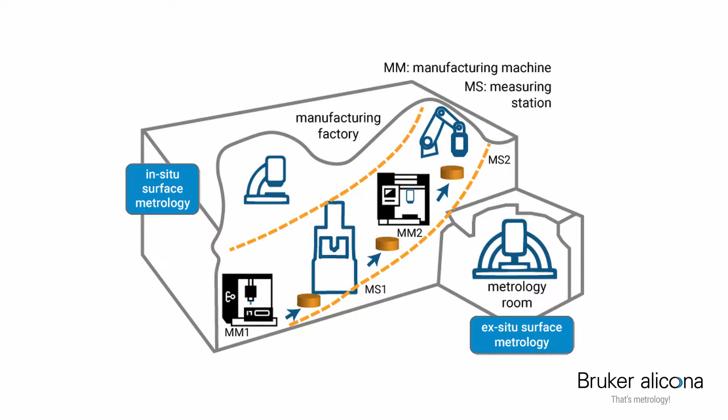But what does production measurement technology stand for, and what does it mean for us? We would like to explain this in 5 terms. Depending on where the measurement system is located, we talk about ex situ and in situ. Ex situ means it is located in a separate measuring room. In situ means it's located in the production hall.

Then we also differentiate between inline and offline. Inline means directly in the production line. Offline means directly next to the production line. And then we have a special term called on machine, which means the measurement sensor is directly integrated into the production machine.

And now we are changing location and start with the first application and the first company, Festo.

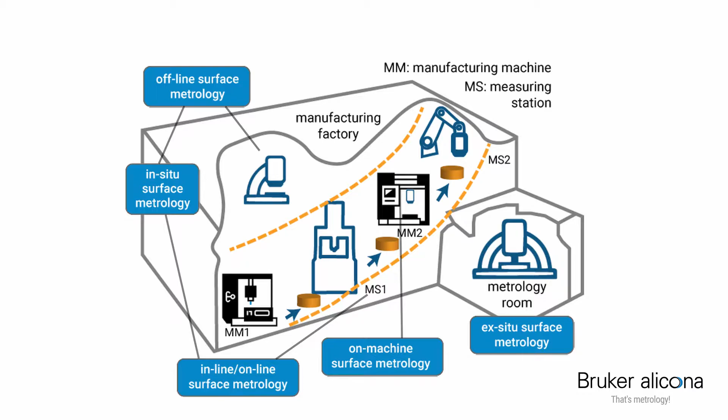With the application of Festo, we are able to focus on 3 requirements to production metrology: usability, flexibility, and the capability of the measurement instrument.

Festo is a global player and an independent family business from Esslingen in Germany. As a world leader in automation technology, they offer products, systems, and services surrounding pneumatic, electrical control and drive technology, whether in factory or process automation sector, for over 300,000 customers in 35 industries.

So Daniel, can you tell us a little bit about the application of Festo? Yes, at Festo we started with 3 different parts where the task was to measure different parameters.

What were the challenges when we started the project? The main challenge was that at Festo only basic quality control was in place. They had different measurement systems to measure, for example, shape deviation with an optical measurement system, and distance or height with a tactile measurement system, but there was no measurement system able to combine both measurements in one process.

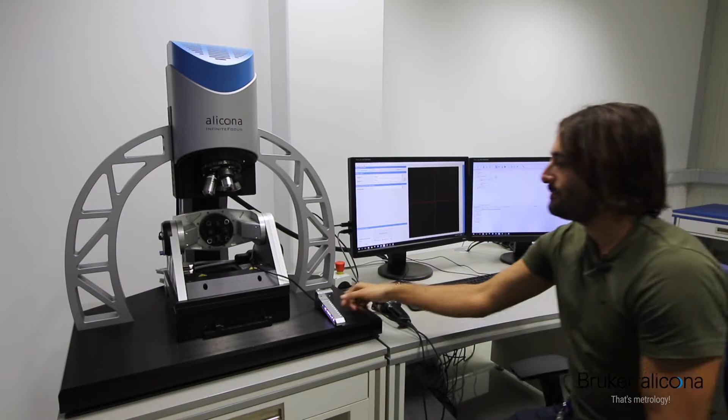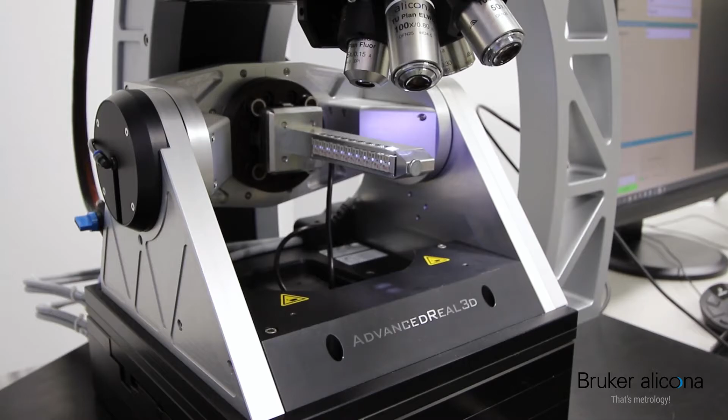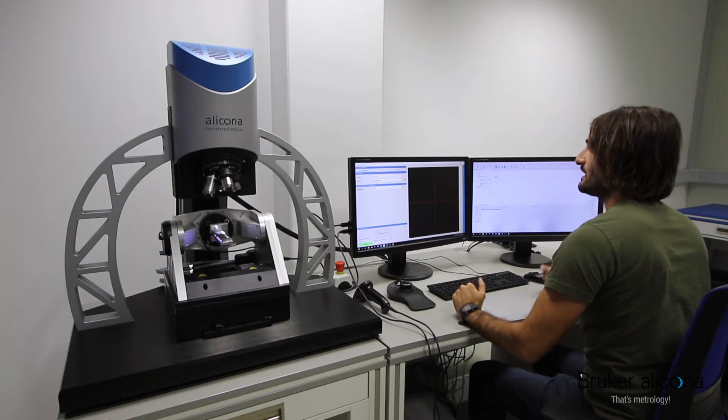Now I would like to demonstrate the automated Festo solution. In the first step, we take the sample holder, a prototype sample holder where we can place 10 parts. We clamp it into the 3R clamping system, then select the measurement program. This can optionally be done with a barcode scanner, so automatically the correct measurement program is selected and additional keywords are written. Then we can start the measurement.

So the Automation Manager combines different functions. It combines the dataset acquisition and also a specific analysis here, and we can have specific export. In that case we will have a PDF export, CSV export, but also a Q-DAS export, and this is done automatically for all 10 parts.

Now we can see the Automation Manager result page. In that case, for two measurements, we have two data sets. They are indicated with a green bar, which means that the measurement parameters are within the tolerances, and we now can continue with the next measurement.

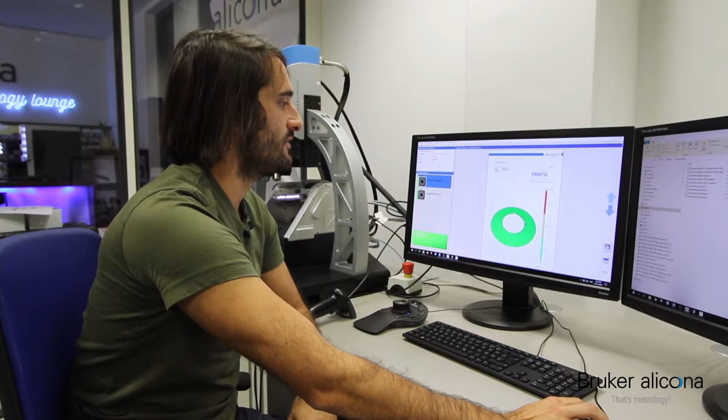Daniel, thank you very much for the video. I think it showed very well how the measurement process at Festo works.

But now let us go to the next requirement of Festo, and this was the flexibility. So flexibility is what we have spoken before, that it is possible to measure different parts of different shape, color or material, but also different parameters on one measurement device.

Perfect. But we will hear about flexibility later on in the webinar as well with the company Miltera.

And now the third requirement for the production metrology in Festo was the capability of the measurement instrument. For Festo, it was important that acceptance measurements according to the VDA5 standards are conducted. That means different and several parts have to be measured by different operators, and a certain result has to be achieved. And we achieved very good results last year in 2019.

Yeah, and the capability of the measurement instrument was also a very important decision criteria for Bruker Alicona measurement systems for the Kendrion group. And therefore, we would like also to deal with this application.

The Kendrion group is basically a company that develops, manufactures and distributes high quality electromagnetic and mechatronic solutions for industrial and automotive applications. Daniel, can you please tell us a little bit about this kind of application?

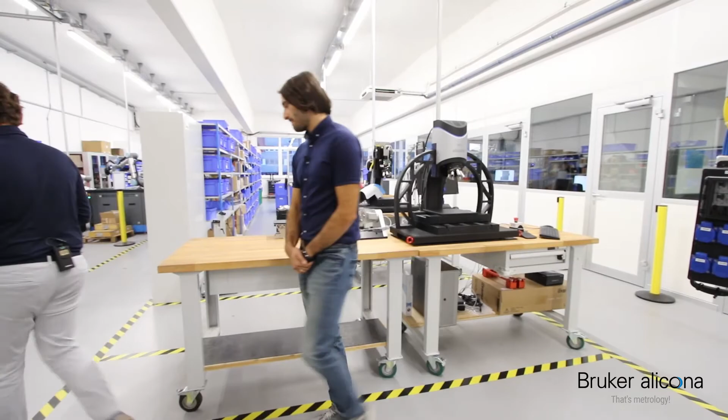Long-term stability of a measurement system is very crucial for production metrology because it has to ensure high process reliability at all times. If a component is measured at different points in time over a longer period, results have to be consistent even when environment like vibrations, temperature and illumination vary.

So we are showing the next application based on the customer Element Six, Daniel. Can you tell us why they decided for a cobot solution?

Element Six is a company for manufacturing of high performance materials based in the UK, and they're using Bruker Alicona measurement equipment to analyze various types of tool wear but also wear behavior. One of their key parts for the new test series was the integration of a fully automated test and measurement equipment, where they're going with the measurement equipment inside of the turning machine, doing the measurement without unclamping the part and then going out again and delivering the results.

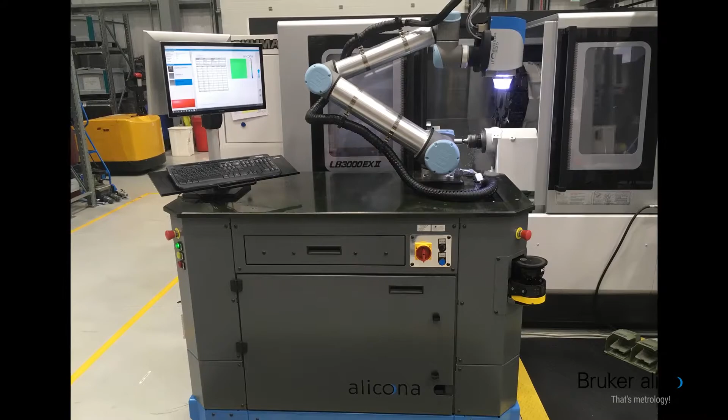With the introduction of automated tests and measurement processes with the Compact Cobot, Element 6 lays the foundation of a modern manufacturing concept. Both the tool and the workpiece are automatically measured directly in the lathe. A central control system starts the test process. The lathe stops at a predefined point, the door opens, and another signal starts the cobot.

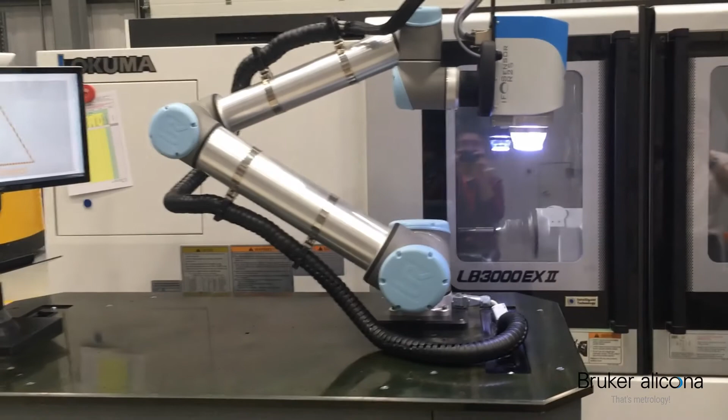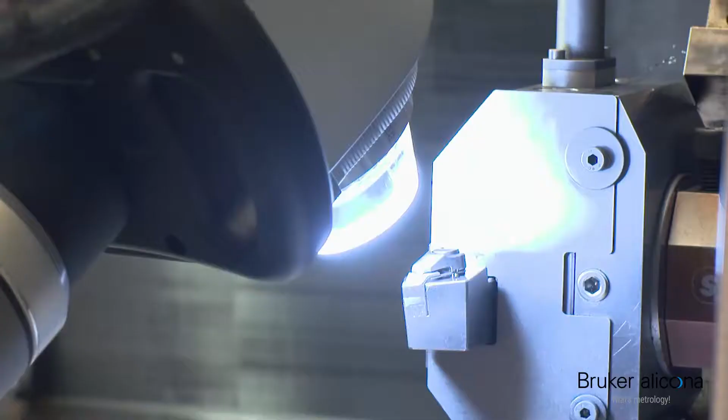The robot arm with the 3D measuring sensor is automatically manipulated into the machine tool and first measures predefined cutting edge parameters of the insert to quantify its wear. Then the sensor moves on to the workpiece and measures the roughness, which allows verification of the surface quality. Afterwards, the robot arm returns to the starting position.

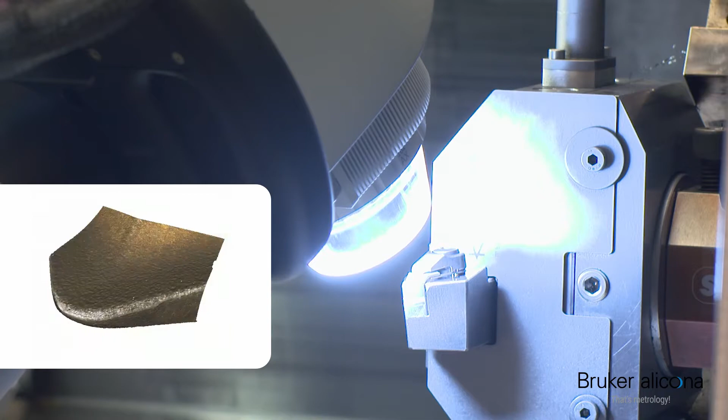All measurements are performed without unclamping the components. The next step, which is in planning, is the automatic correction of machine parameters based on the measurement results, to reach a fully closed loop solution. The networking of production systems, machines and measurement technology should enable self-controlling production in the sense of Industry 4.0.

And that brings us to the next requirement in production metrology: future-proof technology. The production concept of smart manufacturing assumes that measurement technology is directly integrated in the manufacturing process and can intervene in production. And this theory, how does it look like in reality, Daniel?

An essential part of the Element 6 core business is the development and implementation of several new manufacturing strategies. We have two main aspects here: automation on one hand and connection possibilities on the other. Automation on the compact cobot is realized at Element 6 through fully automated measurements without the influence of the operator, and connection possibilities to the production system are realized through different interfaces which exist, for example TCP IP or Modbus TCP. The eventual goal of the full automation and connection to the network machines is a self-correcting and self-controlling manufacturing process.

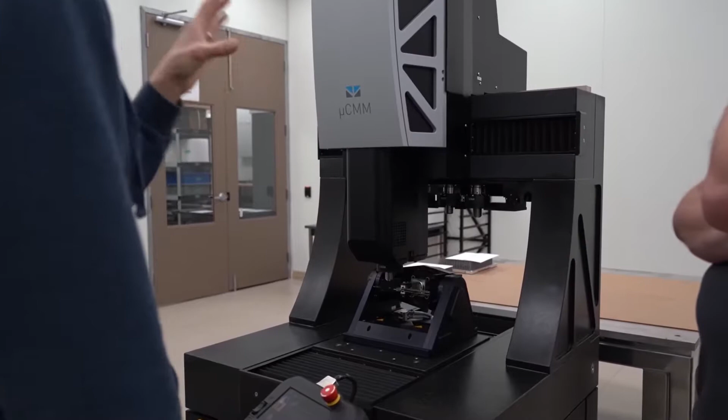When I went to Germany to see my future machine, you were there too - there's my knife. You were also in Germany, right? Austria, actually, looking at this machine. This is Mike's Norseman, so we thought we'd throw that on there for you.

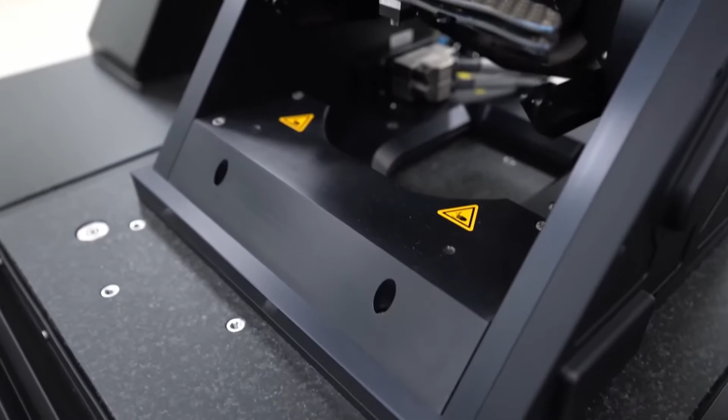So how is this different? It's not a CMM - well, it is a CMM, but it's optical. It's sort of like a scanning electron microscope that moves around like a CMM, making it extremely accurate and enabling surface finish analysis and very tight tolerance measurements.

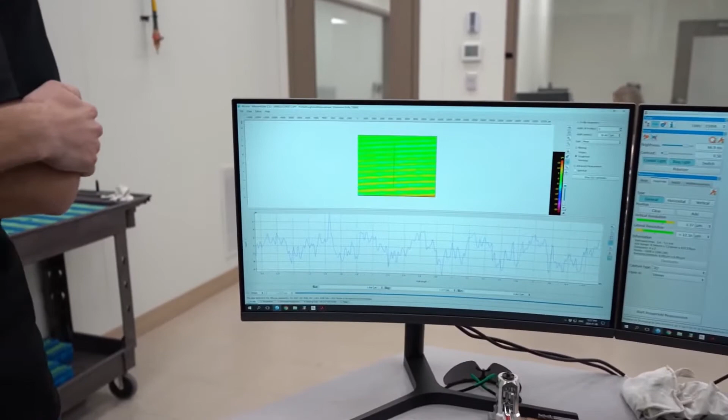So I'll just bring parts up here once a week. That's the scan for the blade surface, right? Is this what you call optical focus variation? Yeah. It's like people do it manually with a light bulb and a little glass thing. This is color varied to show the actual texture of the part.

So normally this surface looks a little different - it usually looks like this. That just shows the scallops of what the actual image shows. This is the finish that our tools make on your knives, showing the scallops produced by that 3/8 ball nose we make for you.

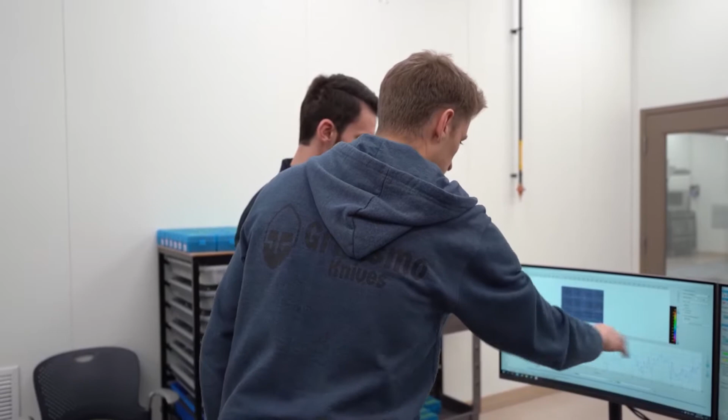This verifies the surface finish quality between each of the scallops, which is interesting. You can see how the scallops move and the finish of each - like a batter mark, one scallop, two scallop, each step over - and then the finish within that scallop. You can see the line here, that's measuring that actual data set.

So that's a 3D scan data set that's then sliced to produce this 2D graph, in that space. If we're getting technical, I think the blade on your knife is older than before you guys made me the tools - so maybe don't use this data to change the tools you're making for me. Gotcha. Well, then it looks like I need an upgrade.

But the point is you can collect a 2D or 3D surface in a patch, and then slice it in whatever direction you want to measure surface finish. The classic way is like a drag kind of thing, but this is actually collecting a 3D data set. So here's an example - Connie had made a scan before of some of the surface finishes on key features of our impellers as well.

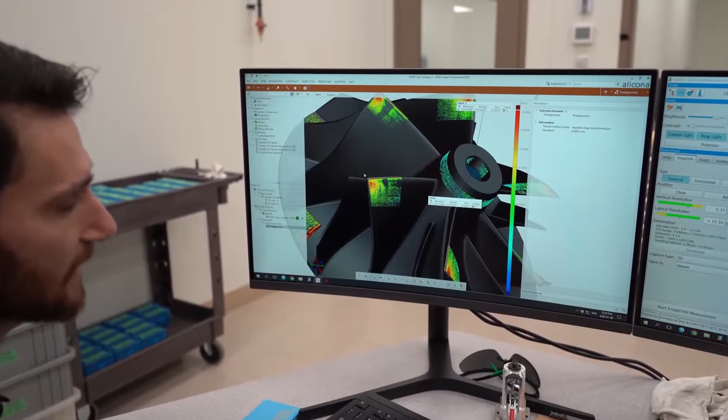This shows a number of different features that we like to control for surface finish, including the blade - because you leave a step over, you have to. We have the blade finish here, and this is actually overlaid on top of an STL model that we imported from the customer, so this allows us to show the actual versus the theoretical.

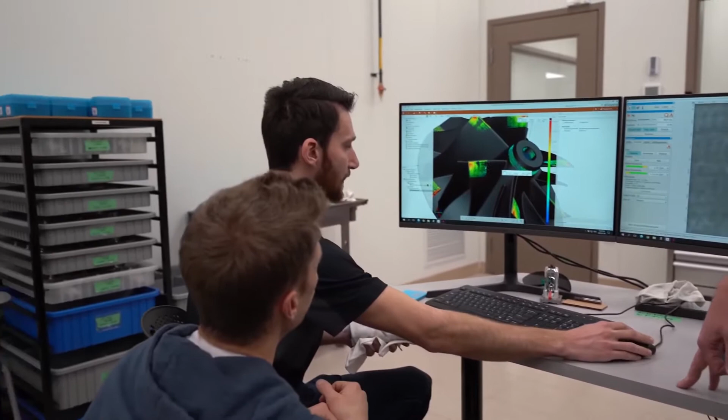Not only does it show roughness with the waviness of the cutting surface, but also the geometric overlay, showing where parts may have differed from the model to the actual. It makes all these measurements in a centered coordinate space, applies the same coordinate system to the model, and compares the two.

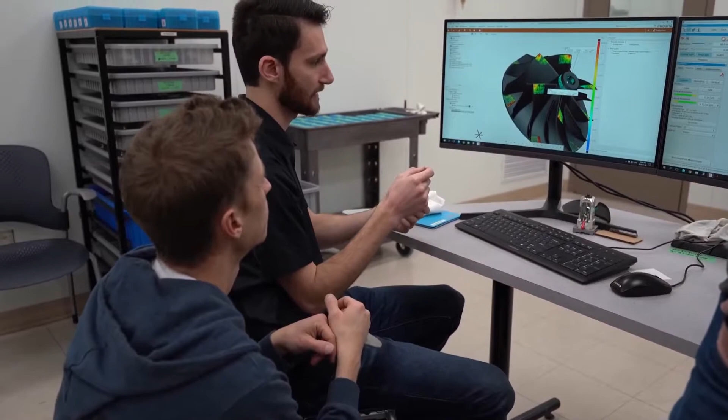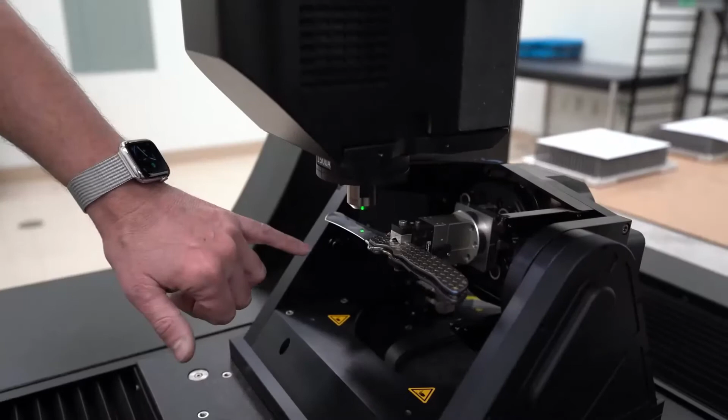Well, I just realized it's a 5-axis - yeah, like a 5-axis trunnion. So you can relate things, like if you wanted to check the thickness of the blade, you can scan here and then scan the other side, check the roughness on both sides, see how they compare, and also check the geometry. I see why you're excited about this machine. It's very unique, for sure.

Flexibility is a very important challenge in production metrology, and we could see this in the video and how Milterra is using our micro CMM to do quality inspection on different components in several industries, from aviation, medical, pharmaceutical, automotive, or even electronics. I'm very proud to see such excited customers like Mike, and his statement that there are a lot of machines put in one. We couldn't say it any better.

Now we are going to the last two challenges of production metrology, and that is speed and cost efficiency. Due to COVID-19 travel restrictions, we had to record this interview with the company Stepper, a leading supplier of stamping technology, some weeks ago. Let us listen to the interview with Mr. Fritz Stepper, the owner and CEO of the company, and let us see which benefits they gain by using Bruker Alicona technology.

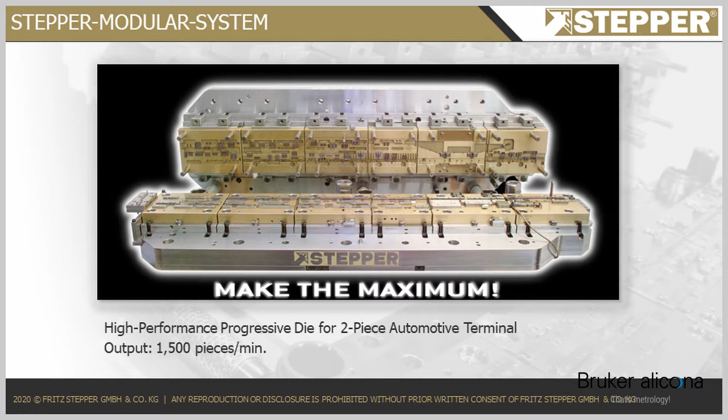Here we are together with our good partner Alicona, therefore we make this interview now. In the last 55 years, many nice developments were made by Stepper. The most important is called the Stepper modular tool, which is the first modular tool worldwide and got the worldwide standard. When people talk about stamping tools, mainly they talk about modular tools, and the original is the Stepper modular system. That's the biggest point, but many other nice developments were made, so we always try to push it forward.

Mr. Stepper, another question: we talked before, I think there is also a very special award that you got during this year. Maybe you can tell us a little bit about what you got this year. Thank you for asking - this is really nice, but it's also showing the innovation power of Stepper. We got the award Toolmaker of the Year.

There were 342 starters in this competition, in this contest, and at the end, the overall winner is Stepper. This is also showing the development power. It's also very nice because we were the first winner who was competing for the first time. All the other winners in the past 16 years competed before once or twice before they maybe won, but we were really jumping into the cold water, and we already got the award. So this was a very nice thing.

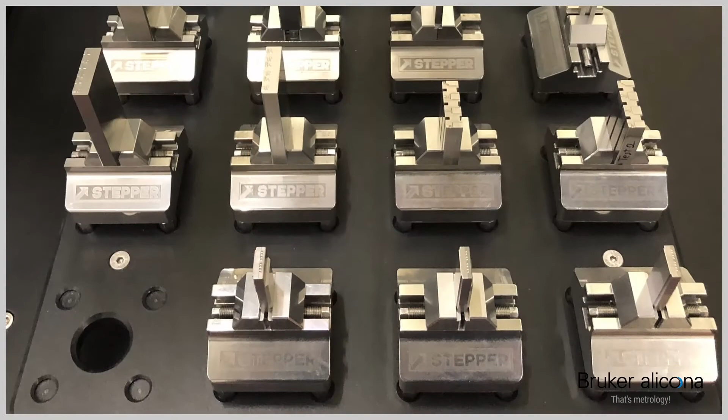This is a really very complicated connector, but we make it only on 2 machines, and the part to be measured is really a key part of the whole tool. So it's really important to have very high accuracy in measuring. Yes, and I'm sure it's a challenging topic to produce this high accuracy, but also to have a measurement system that is able to measure it and prove your accuracy in production.

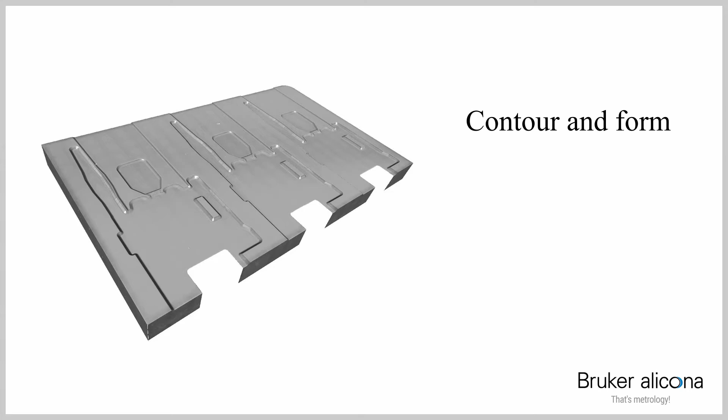It's essential, yes. And that's why the next question is again to Mr. Heisler. What are the most important parameters to be measured on this component? The contour accuracy, orientation, and the surface finish quality.

And what challenges did you face during the measurement? The implementation of measuring complex 3D shapes, which can't be done with tactile methods. In addition, we needed a complete 3D comparison, not only profile segments.

And did you also test other measuring devices? Yes, we have several different measurement methods and systems in-house, but we also checked the market, and we couldn't find any solution like Alicona.

And Mr. Heisler, why was there no machine able to solve this kind of application, in-house or externally? Most of the time, the basic principle is just not suitable. In addition, there are almost no possibilities for combining different measurements. With our Alicona system, we can scan everything with just one sensor - shape and position measurements, as well as surface finish quality evaluations.

So it's a very flexible device that gives you the possibility to solve more measurement topics on one component.

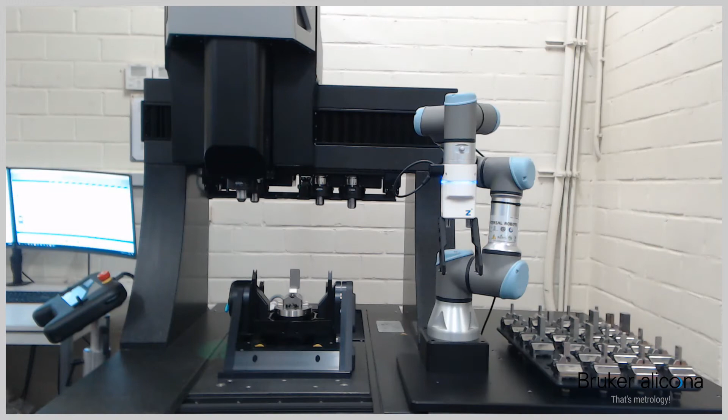Yes. The optical coordinate measuring system Micro CMM has been upgraded with a robotic arm. This pick and place solution enables automatic pickup, positioning, measurement, and sorting into OK and not OK, done in 3 steps only, and requires no prior knowledge of measurement technology. The range of application includes coining inserts, punches, and bending inserts.

Our whole spectrum can really be measured on one machine, which wasn't possible before. So the Micro CMM now really opens, let's say, the whole world. Very good. And Mr. Heisler, what measurement results are then obtained?

100% inspection of all three-dimensional tooling shapes. So really the 3D tooling shapes you are able to evaluate through this process.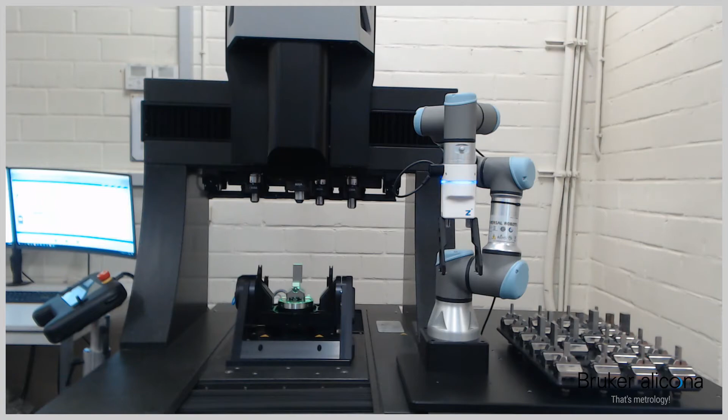And I think maybe another question for you, Mr. Stepper, because you are the owner and general manager of the company, and I know that for general managers the return on investment is also a quite important point. How did you deal with this in this project?

Yes, okay. First of all, as I said, we always look after the market, what's new and what could be interesting for us. So this was also surely the start with Alicona, because this was really a highlight, and now the micro CMM again is a very, very big step, I think, in the measurement world at all. So this machine got immediately into our focus.

When it's happening, then we look deeper in and make a first return on investment calculation. So our estimation, especially with the automation, was that we will have the money back within less than 2 years. So then the decision was made quite quickly, because we trust in Alicona.

Perfect, perfect. I think there were some keywords mentioned now - really the automation, also you are really running the machine 24/7. So I think it's a good proof, this interview, that Alicona has a future-proof technology and that we are really ready for production metrology.